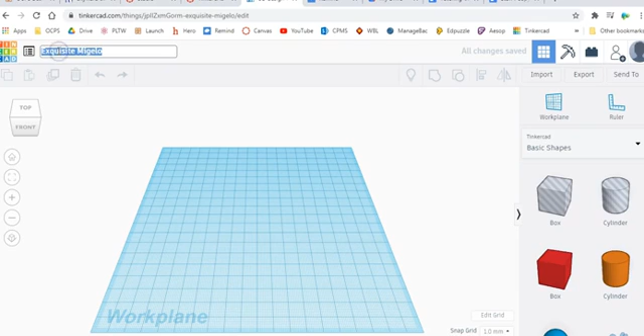So I'm going to go to TinkerCAD. Once I'm all logged in, I'm going to go to Create New Design. I'm going to title this after the activity, so I could put Schnettler Your Name, or I could put Schnettler Name Tag. You would put whatever you're going to put for your name.

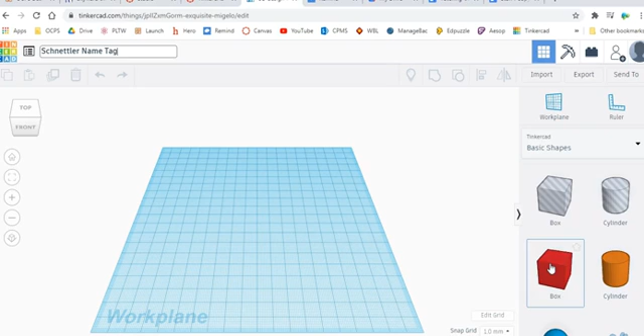So when I first saw this assignment, I assumed that I was going to make the base first, but that is not the case. You want to put the letters on, and I will explain why in this.

How do you get the letters? Well, if you scroll down on your basic shape menu, you should be able to pull out the text, and it'll hop right out. If you are having some internet issues, sometimes there will be a delay in that, but it should work pretty well.

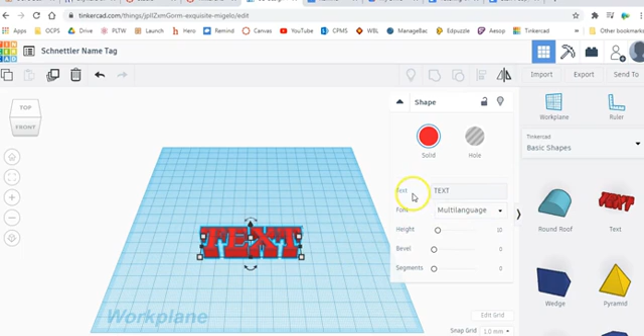Here you have the text, so you can change this to hello, or your name.

Whoops, and I deleted it, so we're just going to bring it back. I could have also hit undo, but I had only just started the shape.

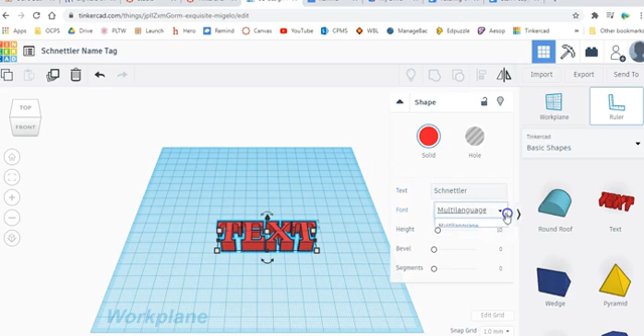Whoa. I got some kind of fancy grid on there.

Do we need to be in all caps? Yes, okay, you need to be in all caps to type that out. That's why it wasn't doing it before.

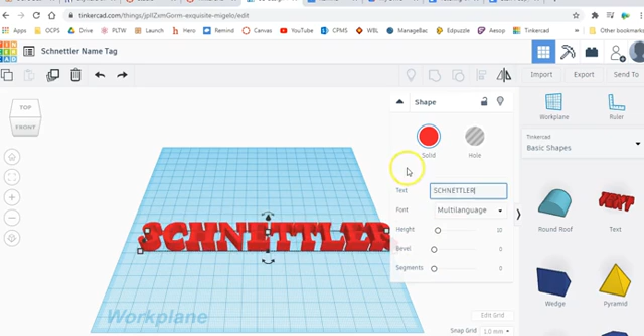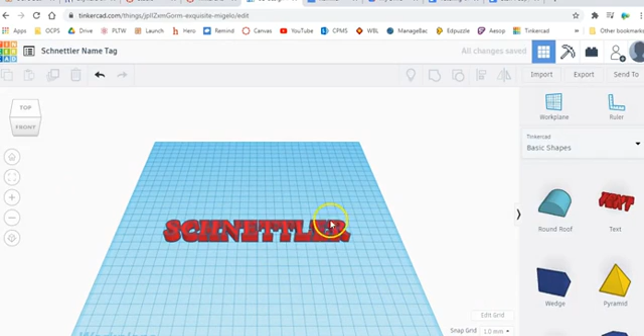My name takes up the entire work plane. Thanks, Mom and Dad. So if you have a long name like me, and you need to make it bigger, you can come down here and just make your work plane bigger. And there we go. It would also be okay if it was hanging over the work plane. That wouldn't be a big issue.

So some things I wanted to show you while this was highlighted is you do have different fonts, so you can change the shape and the style of the letters.

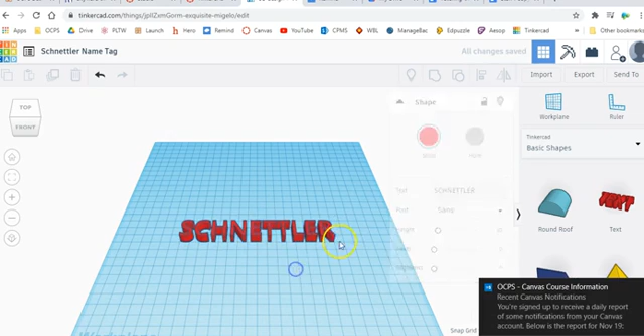I think I actually liked that one pretty well. Again, of course, you want to... forget to close my email.

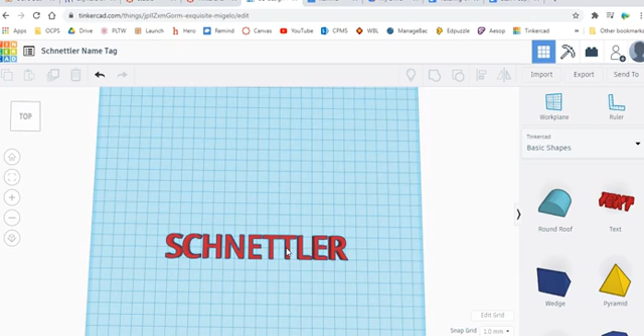So I like this one. You can change the color of the letters, but there's no point other than it just makes you happy, because if we are printing these out on the 3D printers, it's whatever plastic is in there. The entire thing's going to come out the same color. So it doesn't matter if you make this a beautiful rainbow, you won't be able to tell it when it gets printed out. But if it just makes you happy for it to be certain colors while you're working on it in TinkerCAD, that is totally up to you.

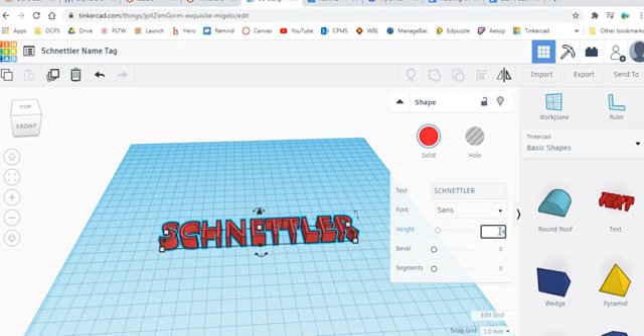I need to change the height. So the height of this right now is 10, and the directions said the letters should be 4 tall. So I'm going to shrink them down.

There are other things you can play with, like the bevel. Ooh, actually, I think I really like that. Segments. That's fancy.

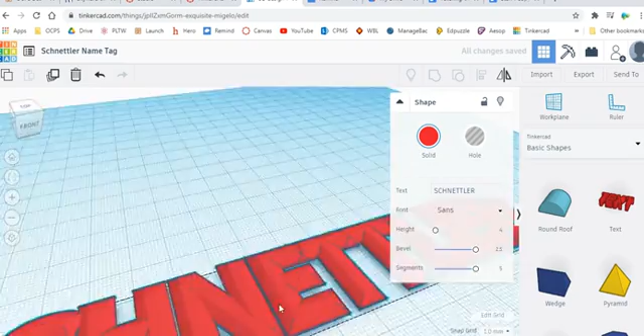And so that's one thing, guys, you don't have to worry about playing around with stuff. You're not going to break anything. You can always do undo, or you can start over. One other thing I wanted to show you, if you come back up here to your basic shapes, you do also have text and numbers, where you have some other options if you wanted to look at some of those other options.

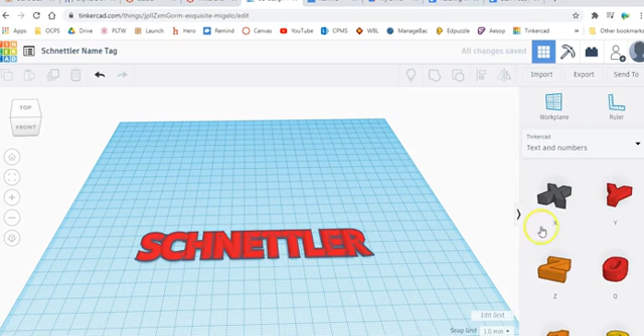I'm not going to cover that in this tutorial because I kind of feel like that's the I'm-feeling-comfortable-with-TinkerCAD group, who probably aren't watching the tutorial because they feel comfortable with TinkerCAD. And you would have to individually place each one of those letters. But I wanted to let you know that that was there. It is a feature.

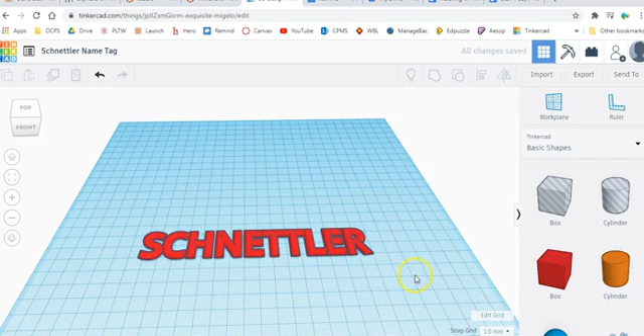Okay, so now that we have my name, I'm going to double check and make sure I didn't change the height with all my fanciness. Okay, what happens? Ooh. Yes, okay. I'm going to make the plate that it's going to sit on. I know that this is only supposed to be 2 millimeters tall from the directions. So I'm going to go ahead and make it that first. I am going to change the color, otherwise it's going to just totally blend into my name.

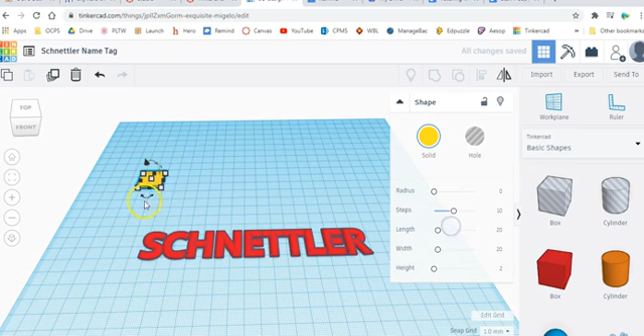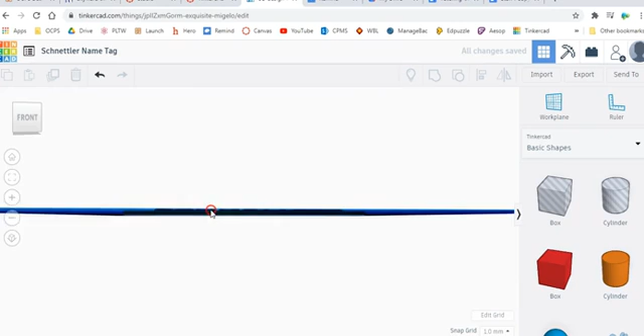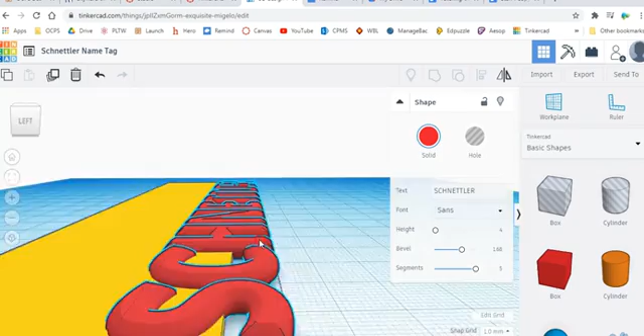But that is all it's doing. And then I'm going to take a corner handle and make it to be about the size that I want. Yeah, that looks about good. Now, if I just combine them like this, it's not going to be what they've asked for, because your letters are just kind of squished into the nameplate. You can even kind of see them just barely peeking through the bottom there. And the plate is supposed to be 2 millimeters and the letters are supposed to be 4.

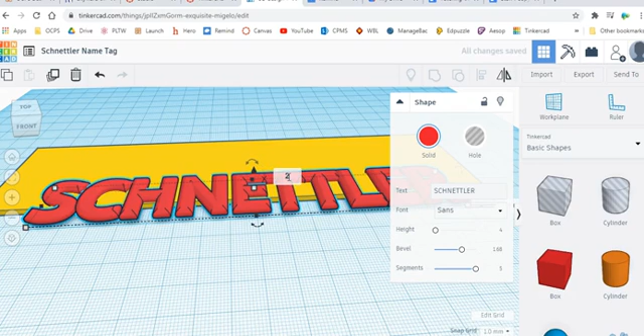So what I want to do is grab the little cone on my name, make sure I have just my name highlighted, grab the cone, and I'm going to raise it 1, 2 millimeters. Again, if you were using a trackpad or you were just in general having an issue getting that, once you get started and you drag the cone anywhere, that number box pops up and you can just type the height you want in there. So again, I want the height 2. That's what I type in, and it'll go ahead and lift that up for you.

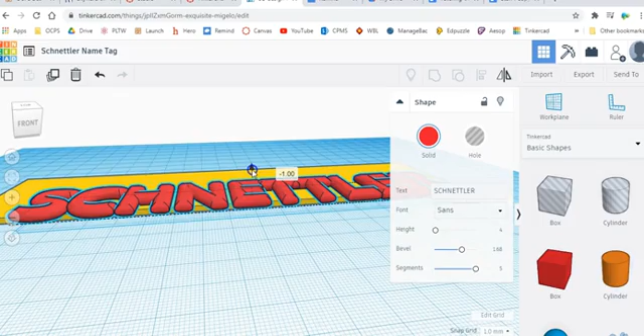I think things happened while I was talking. Okay, yeah, I think I was just talking and not paying attention to what I was doing. It's fixed now. I'm going to uncenter it a little bit because I do still need to add that hole. Maybe make it a little smaller. Yeah, that looks a little bit better.

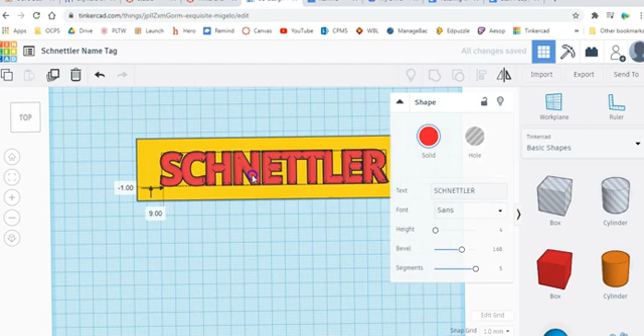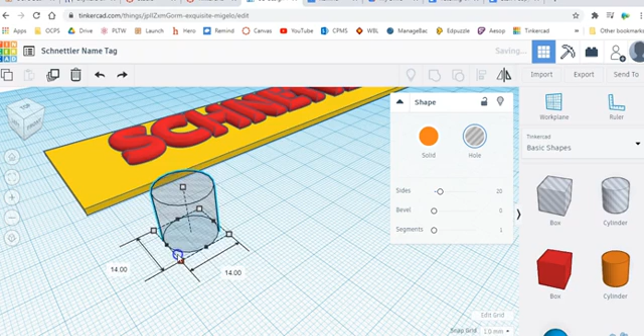Perfect. All right, so now we need a hole, and it is supposed to be a 5 millimeter diameter. The diameter is all the way across the circle. So from here to there, it's telling me the diameter is 20. Now the trick is, if I click on this, I'm going to squish it into an oval shape, which is not very handy. So I'm going to undo and hold Shift and one of the corner ones, and that should shrink everything equally at the same time.

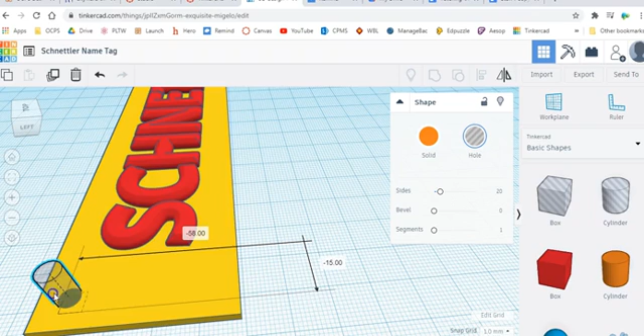I am also just going to make this a little bit taller and move my screen around. I'm going to put my hole up in the corner, and I'm going to use the cone to make sure I've gone all the way through the shape. Now don't forget, you can always flip it over and look at the back of your shapes as well. So I can tell that the hole is going all the way through, so I know it's going to go all the way through my tag.

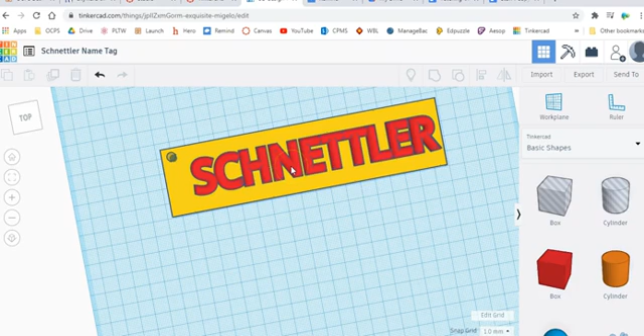You can put the hole anywhere you want. Again, yours does not need to look exactly like mine does. Play around with it, see what you like. That's what I did. You can put the hole here if you like. There. Maybe you want to put it here. Maybe you want 2 holes because you want to print this out and put it as like a door hang on your door. That's fine, whatever. Like I said, I'm just going to put it here.

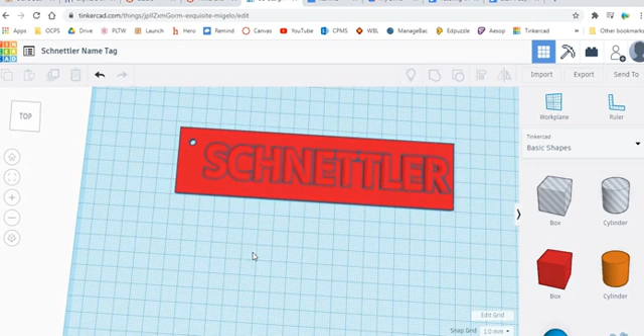And then all I have to do is select all my objects, group, and there we go. It's going to turn all one color, which is fine because that's what it would print as anyway. But again, if that bothers you, you can click it, go to color, and do multicolor, and it'll set everything back to the colors it was before you grouped it. And that's it. That's how you make a name tag.